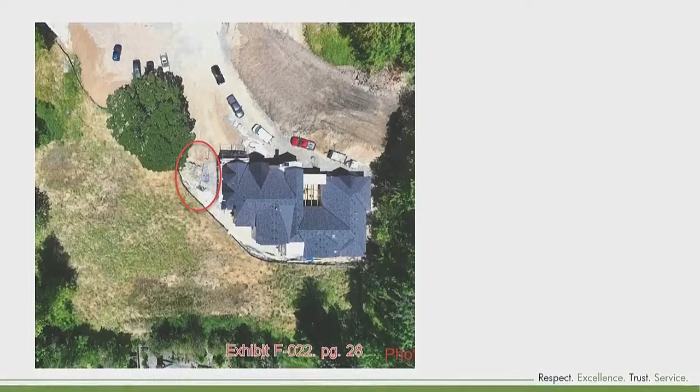And the flow spreader has less flexibility in where it moves. So the stormwater planter for the dwelling, as we talked about last time, really has a lot of flexibility to move around on the site. The flow spreader, though, needs to be able to achieve a gravity flow from this pipe coming from uphill, because water needs to flow downhill. And it needs to be located along a contour line in order to spread equally. My engineering colleagues can come up here and actually explain the engineering more accurately than I can.

But there isn't as much flexibility for where that can move within the site. You can't necessarily put it over here. Its purpose is to help recharge the wetland, so placing it as close as possible to the wetland on a contour where it can flow evenly and recharge the wetland really is ideal from an engineering and a wetland maintenance perspective.

So staff is recommending approval, especially because this has minimized impacts to the PRA based on the initial proposals. We've got a much smaller area, only 680 square feet of modification of the PRA now proposed. So staff is actually able to recommend that approval.

And I kind of showed here, we're past the deadline to submit new written evidence into the record. And again, this is all just feasibility, and more precise construction engineering plans will need to be submitted to the engineering team for their review and approval, and then it will need to be constructed according to plan on site before there can be occupancy of the dwelling.

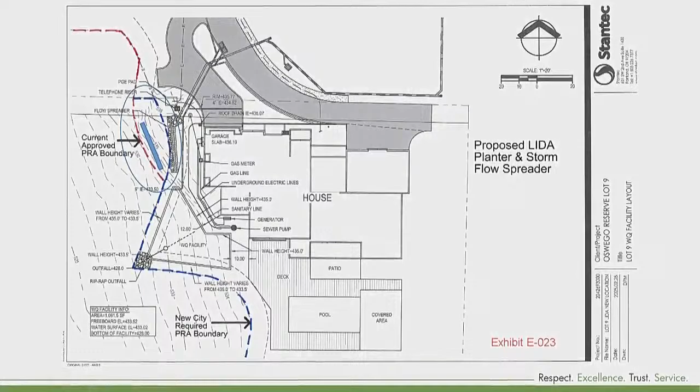And I don't believe I have too much else exciting to say about that. We're able to recommend approval of the PRA modification. I'm going with this Exhibit E24 as my recommendation. It appears to be the same as E23, but because that showed a specific flow spreader location, which might change when they're actually getting into the nuts and bolts of designing the engineering construction drawings, I decided that this drawing might be the better one to refer to since it just shows the area for the PRA modification rather than showing any specific engineering design. So staff now recommends approval of the PRA modification shown in red on Exhibit E24.

There was also an exhibit submitted, Exhibit F23. This was submitted by Mr. O'Brien of the applicant's team, and this is a request to modify condition of approval B1 of the staff report, LU 24-0036, to change the terms on each parcel to on the parcel requested for occupancy. There's actually already a title for all of the B conditions, which is that they need to be completed prior to the final building inspection or occupancy of any dwelling on any parcel.

So staff doesn't really see this as a major change. Staff isn't opposed to the modification to this condition. We just don't see it as necessary. The applicant still needs to plant all of the required mitigation on Lot 9 prior to final occupancy either way. So it's not really making a change for us in what would be required for the applicant or for the site. So based on all of this, I'm keeping it short and sweet.

So this condition A1 should be 680 now because staff is recommending approval of 680 square feet of modification, taking away wetland in that area up here and adding it probably on the south of lot 9. So that 680 square feet going away over here should be added at the bottom. And then down here, the number is correct of being a 3-to-1 mitigation ratio for that additional 680 square feet. I'm sorry, I made that far more confusing than that needed to be. I did, so I apologize.

But that is really it for the staff presentation. I do have colleagues from engineering here who can come up and help to answer if there are any more technical questions about the engineering aspects of the flow spreader or kind of anything else. Thank you.

Go ahead. I have a question that is more background for me. The flow spreader is there because there's runoff from a parcel above this development? That is correct. I can ask my colleagues from engineering. Was that a condition of the recording of the plat, that they had to mitigate that runoff? I don't remember. And isn't it the responsibility of the uphill people to mitigate their own water flow?

There is uphill water that has historically flowed downhill, right? The downhill property has sheet flow then going across the property. If you want to alter that sheet flow, the downhill property needs to alter it. When water flows, you have basically an implied easement to continue to allow the surface flow to occur that has occurred over time. It's a natural condition. So if you want to change that, then the applicant has to decide how you can change it, but still basically route the water around the development. Okay, so that it flows down to the wetland still. Okay, thank you.

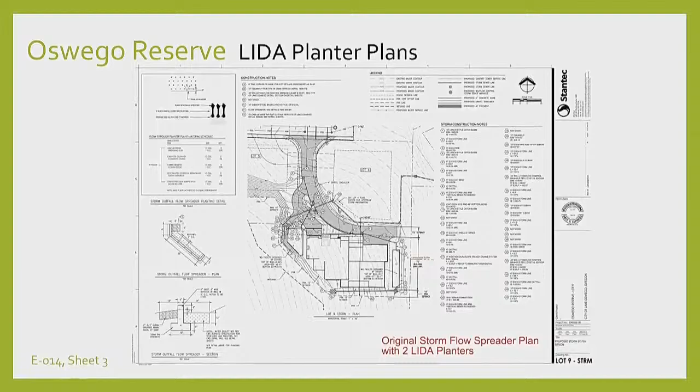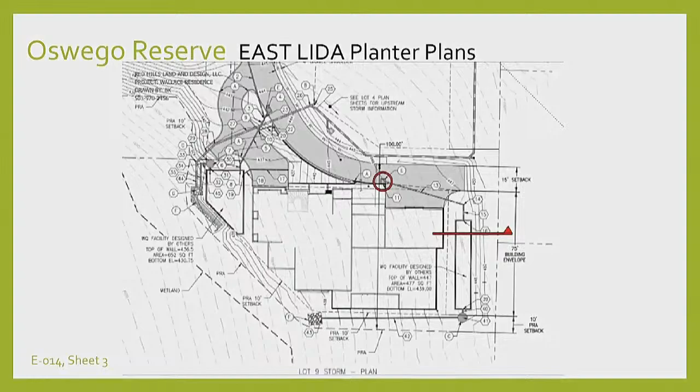Next, regarding occupants and public safety—this is a 4-generation home. The original LIDA facility on the east side of the property had some flaws missed during the design process and the city staff review process. The natural slope of the lot wasn't fully taken into account, so the facility needed to be buried very deep underground. Due to the constraints of proximity to the existing home, the depth of the system, and the nearby trees, this LIDA facility became impossible to build.

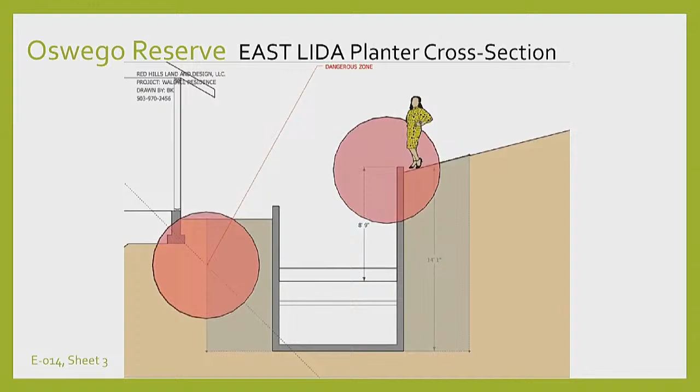It looked good on paper. However, as on-site planning took place, we realized that the structural safety of the dwelling and the construction crews was in extreme danger with this location. The finished elevation of the facility was expected to be 8 feet 9 inches below the surrounding grade level, making this facility dangerous to occupants and the public after completion. Additionally, the second design attempt to keep all improvements outside the PRA also creates a dangerously tall wall for occupants and the public. Next, I'd like to talk about the available construction materials and methods.

As a residential home builder, I am limited to construction materials and methods that make residential homes possible. Staff refuses to acknowledge this fact. For example, if someone asks me if it's possible for me to fly to the moon, I could answer with two very different interpretations of the word 'possible.' One answer would include every available technological advancement with no limitations whatsoever, resulting in 'yes, it's possible.' The other answer would be a realistic look at my resources, health condition, and financial limitations, resulting in a firm 'no, it's not possible.' Unfortunately, the planning staff is refusing to acknowledge these very evident limitations on where the LIDA facility can be built with this specific application.

However, previously, we were able to acknowledge all this in an original approval of 4,100 square feet of PRA adjustment.

Next, I'd like to talk about system costs. In most cases of residential construction, the limit of possibility hinges on project cost. Planning staff has repeatedly stated that cost should not be a determining factor in facility placement. However, in the real world of construction, financial feasibility is a key consideration. A design that is technically possible but financially unviable is, in practical terms, not possible.

I would like to point out that the most recent LIDA proposal, emailed to Joanna on February 27, which attempts to keep all LIDA facilities outside the PRA, will require about half a dozen mature trees to be removed and adds over $100,000 of costs to an already expensive system. This option presents an unreasonable financial burden, making it not possible within the scope of the project.

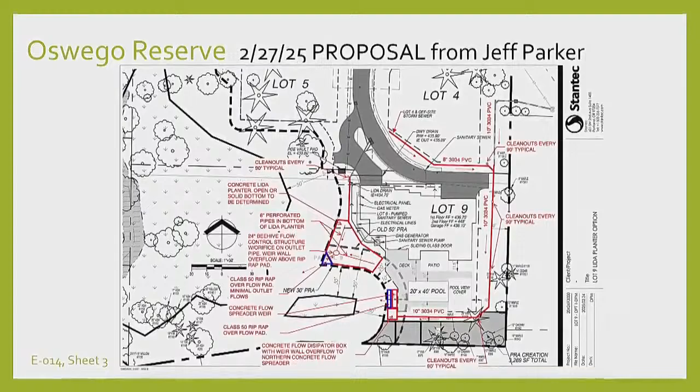Additionally, the second design, which attempts to keep all improvements outside the PRA areas, requires nearly a 14-foot retaining wall. This is unnecessary and makes this option financially impossible.

Next, I'd like to talk about the impact to the environment. I'm glad to hear that staff changed their mind on this just today, but the prior approved disturbance area for the LIDA facility has already been scraped of all topsoil and vegetation. The area was already graded using cement-treated structural fill methods, and utility storm lines have already been run to this area. This previously approved 680 square feet PRA area has already been developed and will never carry any of the characteristics of the natural PRA area, as it does in undisturbed sections that we propose to replace it with. I hope you can see that the disturbance area - staff is refusing to acknowledge this simple fact in prior meetings.

Next, I'd like to talk in a little more extent of this environmental issue regarding the existing area. When we talk about staff's inconsistent application of code requirement, the impact to the environment is the most obvious display of such pushback - that is against everything they should be standing for. They have mentioned multiple times that the new PRA is starting from a clean slate and no prior approvals have any weight. This contradicts previous approvals and established code standards.

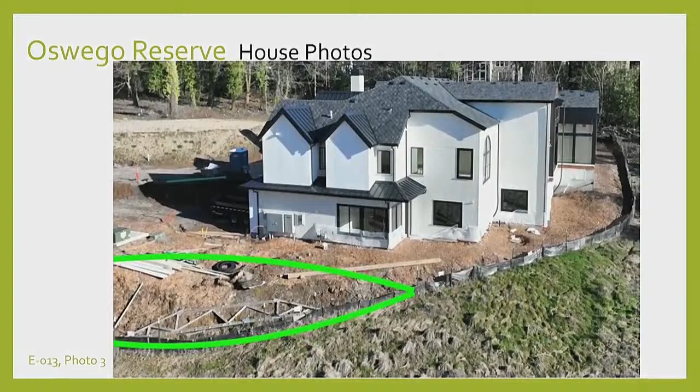The prior approved disturbance area for the LIDA facility has already been developed and will never carry these characteristics as it does in the undisturbed sections that we propose to replace it with. The fact that 680 square feet of the PRA has already been disturbed and graded should be staff's main priority to replace this with an undisturbed PRA area. However, staff continues arguing against their own logic and intent of the code to further complicate the project for the developer. Unfortunately, this too points to reasons of denial of their prior application outside of code restrictions and compliance by staff. I hope you can see that the current impact to the prior approved disturbance area is sufficient basis to relocate the PRA to an undisturbed area.

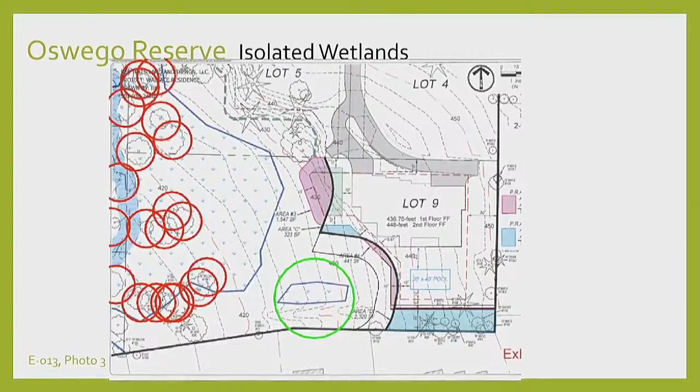Additionally, planning staff in their original denial failed to acknowledge that the isolated wetlands as not having any trees. Ryan, along with the Wallaces, had an uphill battle to prove that the patch of isolated wetlands did not have any trees on it, as you could clearly see on the plans depicted as a simple fact, and therefore only needed a 30-foot PRA spacing versus the 50 that the planners tried to impose. These variations of code interpretation by staff are being applied inconsistently to this applicant's detriment.

Next, I'd like to talk about tree preservation. Joanna and Ellen, in their email responses to Jeff Parker on the 27th of February, stated that the planning department is willing to approve the latest proposal to run the city's failed stormwater facility that's overflowing into Goodall, Oswego Reserve, along the east and south side of the property. The planning department was willing to compromise about half a dozen mature trees that take over 50 years to establish, instead of allowing for a minor PRA adjustment. This decision contradicts the intent of the code and raises concerns about whether the rationale aligns with established code requirements, or if it is based on considerations beyond standard code enforcement.

Our proposed PRA adjustment will require 0 additional trees to be removed and will focus on preserving the natural vegetation corridor for wildlife. This decision raises serious concerns about fairness and consistency in the application of tree preservation policies. It is more than obvious that the applicant is being mistreated and bullied by the planning staff as they continue to push against all logic.

I would like for the DRC to take a close look at these actions and make sure that these abusive demands on the environment, your time, my time, and the entire applicant's team are not a common occurrence with staff personnel. They are here to implement the intent of the code without weaponizing themselves against individuals or teams they have personal issues with.

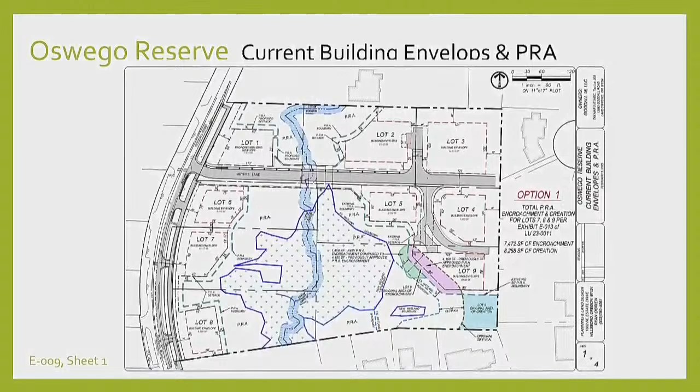I'm not talking about what was on the eastern side before. I'm talking about what was just presented this evening. Yeah, so this is the facility that was presented. If you look at the cross section, this is the system that was presented by Ryan, and that was to be acceptable to the applicant. It looks good on paper, but it's impossible to build, so this is the facility we're talking about here.

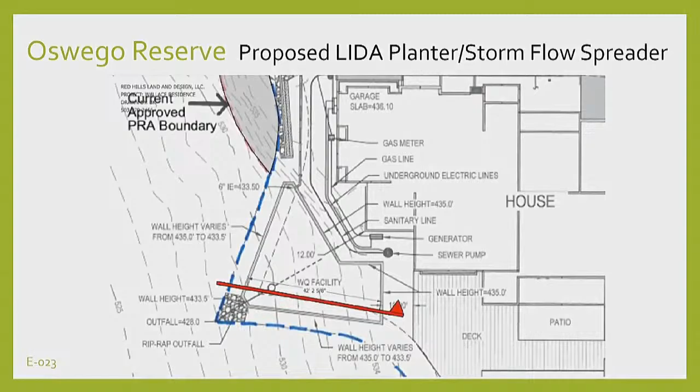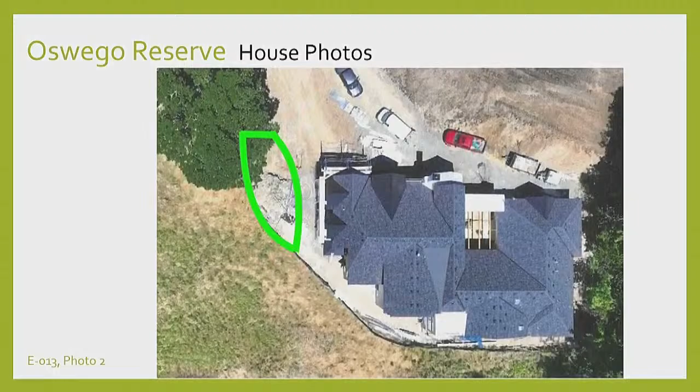Well, what did I hear from the previous speaker? So it looks good on paper. What makes it impossible is the financial constraint of having to carve into the hillside 14 feet deep, and have retaining walls with a drop in the wall of approximately 8 feet.

As depicted here. Which one of you is speaking for the project—the person who said it would be acceptable, or you? I'm very confused. So we're presenting as a team.

The city staff required us to provide other options. These other options were already considered within our team and were walked away from because of the constraints. It's a stormwater facility that's not going to be used by the occupant—it's there to filter the water and let it go into the PRA, essentially making it a habitat space for wildlife. So the temporary encroachment in an area that's feasible and possible to build is the best location. That's option number one in the material we presented.

Okay, I'm sorry, I'm still confused. Could you go to the drawing that shows your proposal number one, and how does it differ from what staff is amenable to?

Oh, maybe I'm holding this upside down. I'll get there in a second. Are you saying the spreader is the issue, or the LIDA? So they're both encroaching—our LIDA would be encroaching.

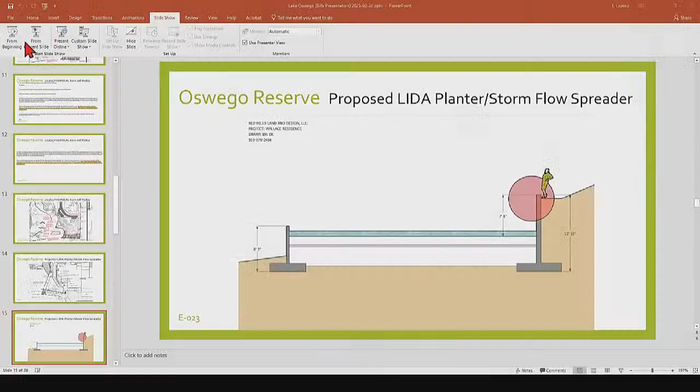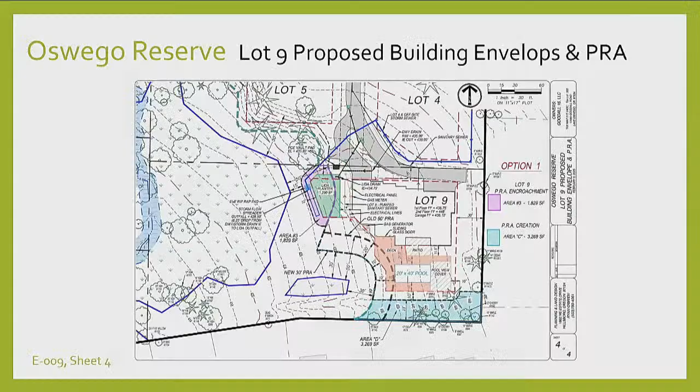Go back. Okay, he doesn't want to build that one. See the red outline there? He doesn't want to build that one. That's the 14-foot wall, nobody wins on that example. He wants to go up where the flow spreader was to be and put the LIDA facility there. That's what he's looking for. Thank you, time's up.

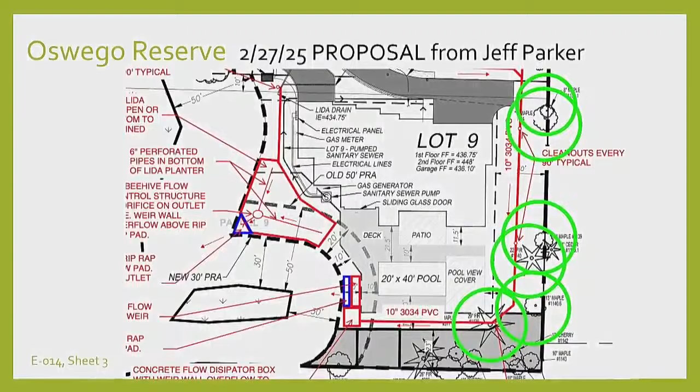Okay, I'll push that over to administration or city staff. Any comments? Yeah, I'm glad that this, sorry, Johanna Hasty, Planning Manager. I'm glad that this, actually, can you put it back up?

Glad that that exhibit is there. Just want to clarify that staff at no time has reviewed, approved, or centered on this, the flow-through planter and that line coming down the east side and south of the future conceptual pool. We didn't review that. It wasn't shown on the exhibit that came in on the 27th from Jeff Parker, and that is Exhibit E-014. The only thing that was shown on Exhibit E-014 was the LIDA planter that is completely outside of the protected riparian area.

And I am sympathetic to the applicant's issues that he's raised about cost and feasibility and the height of the wall. But I want to remind the commission that, one, the applicant has requested and received approval to modify the RP district. And we now have, instead of one large wetland, we have an isolated wetland and a larger one associated with Nettle Creek. Now, with less encumbered area, we still are back to, can we avoid impacts to the protected riparian area?

That's first and foremost. And then the second question is, can we minimize it? And then we can talk about mitigation.